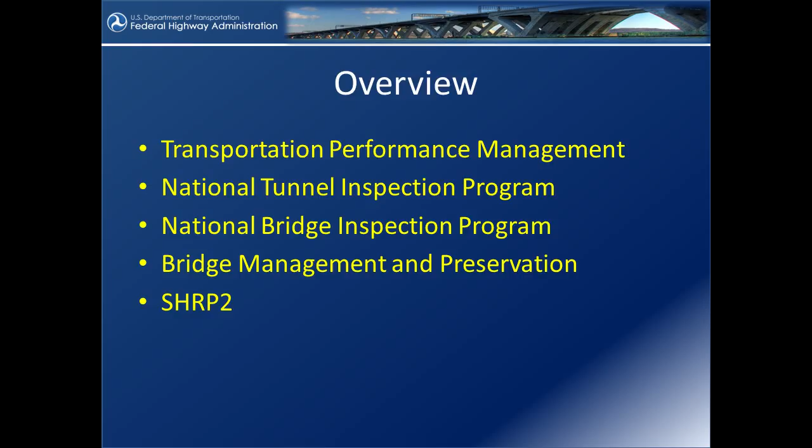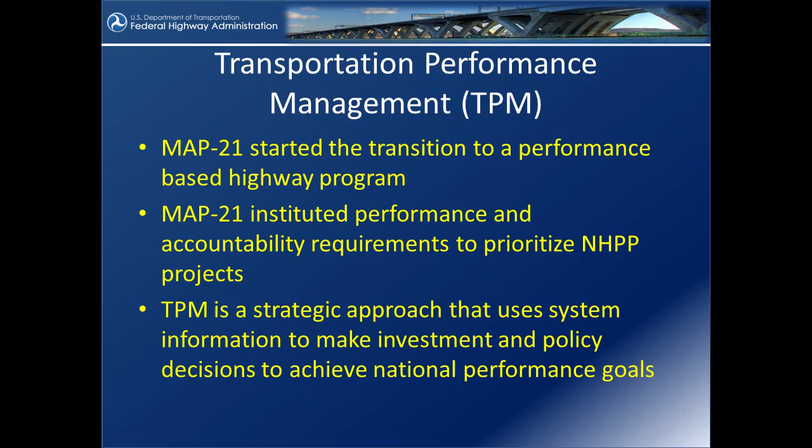As far as the Transportation Performance Management, MAP-21 has really pushed that and started the transition towards a performance-based highway program. MAP-21 is instituting performance and accountability requirements, and that's going to help prioritize the NHPP, which is essentially the major funding source for the NHS. Performance management is a strategic approach that uses system information to make investments and policy decisions to meet these different goals. So related to MAP-21 and performance management, FHWA is in the process of rulemakings, notices of proposed rulemaking, which we're going to talk about a little bit later. They were out there for pavement and bridge condition performance, and also for asset management.

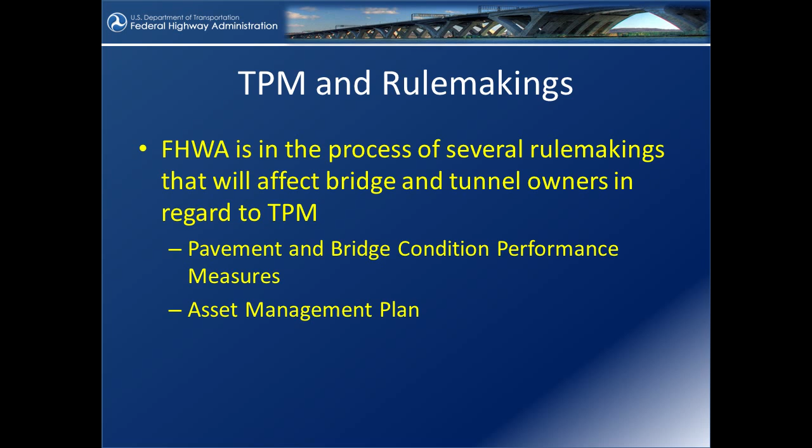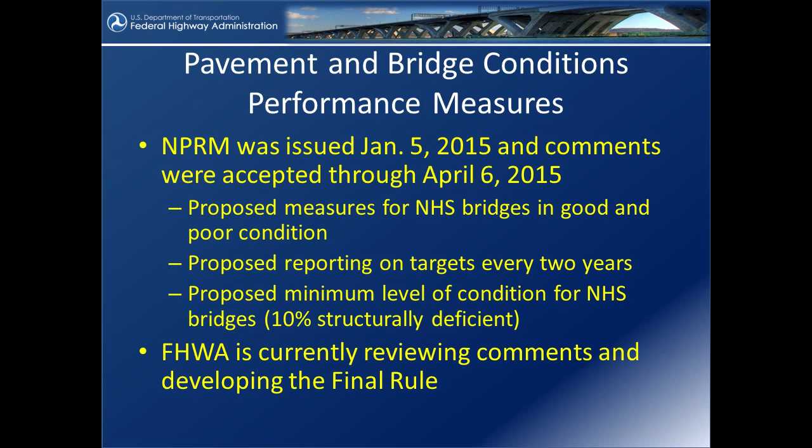The rulemaking for the performance measures was out on January 5th and closed on April 6th, and that was related to performance measures for the NHS, whether they're in good or poor condition, nothing in fair. Typically it's good, fair, poor. We're going to track good and poor. We also talked about reporting, how that was going to be done, as well as a requirement in MAP-21 which indicates that the NHS structurally deficient percentage should be less than 10%, or a penalty will be assessed. Because the rulemaking closed in April, we've collected all the comments and we're reviewing those, and we're going to come up with a final rule probably in the coming year.

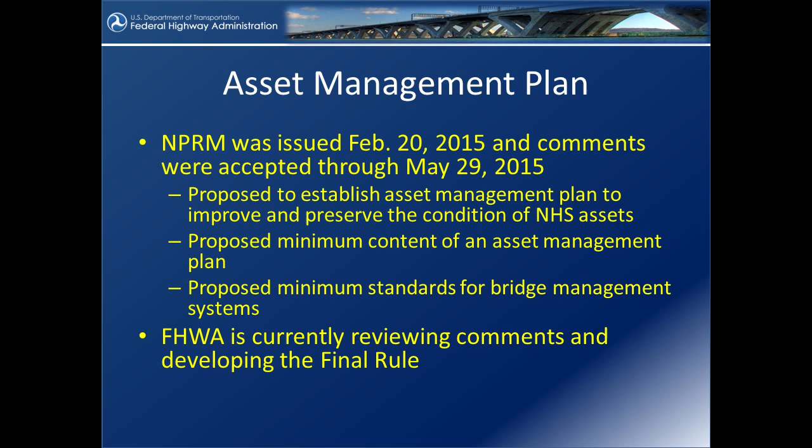Also, the same thing was with the asset management. There was a rulemaking that was sent out on February 20th and closed on May 29th, and that was to establish the requirements of an asset management plan, as well as minimum standards. So we're reviewing those comments also. Now, as far as the National Tunnel Inspection Program, that was also a requirement that we recently went through rulemaking on. I'm going to talk about the standards, the inventory, the Specification for the National Tunnel Inventory, the TOMIE manual, and some training that we're going to be having in the next couple months.

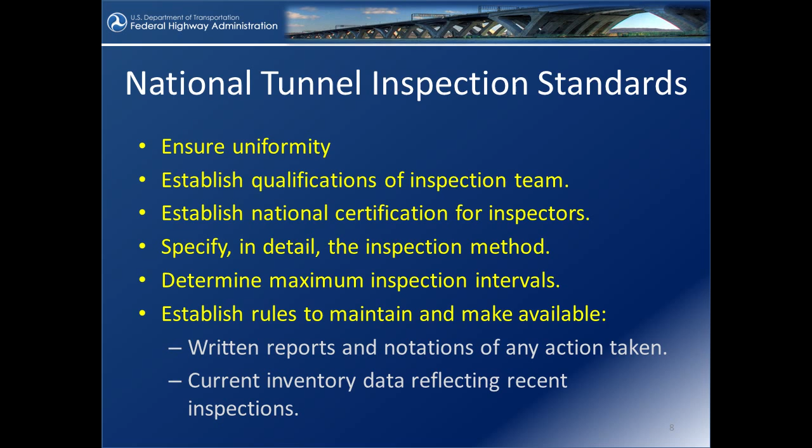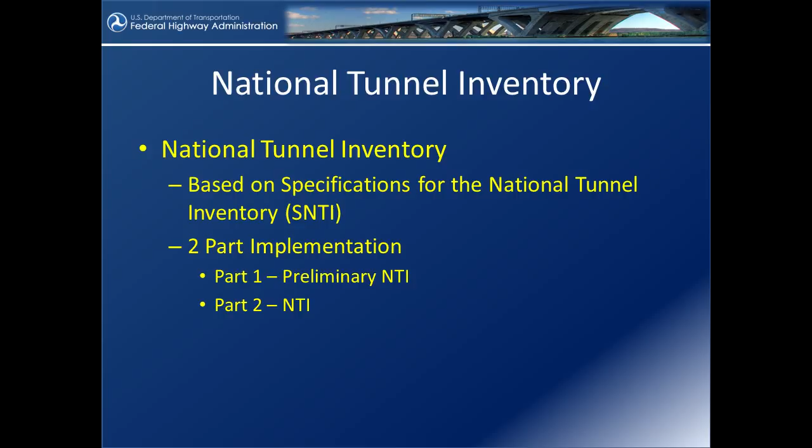So the tunnel inspection standards are similar to the bridge inspection standards, to establish uniformity and the qualifications and certifications for the inspectors. It also talks about how you do your inspections, the inspection methods and the intervals, as well as how you're supposed to do your reports and submit your inventory. Now, the National Tunnel Inventory will be similar to the National Bridge Inventory. If you're familiar with the NBI, this is going to be the NTI, and it'll be implemented in two parts. Part one is a preliminary inventory, which will be essentially geometric data, not really the inspections. Then a second part, a little later on, will be the requirement of having all the inspection data done by qualified people.

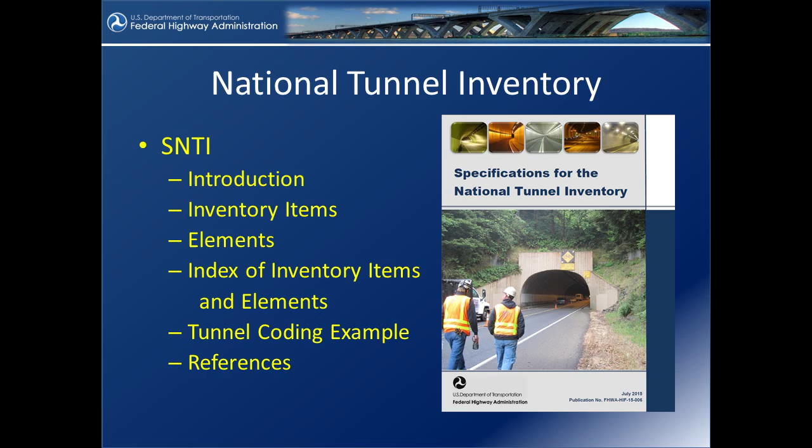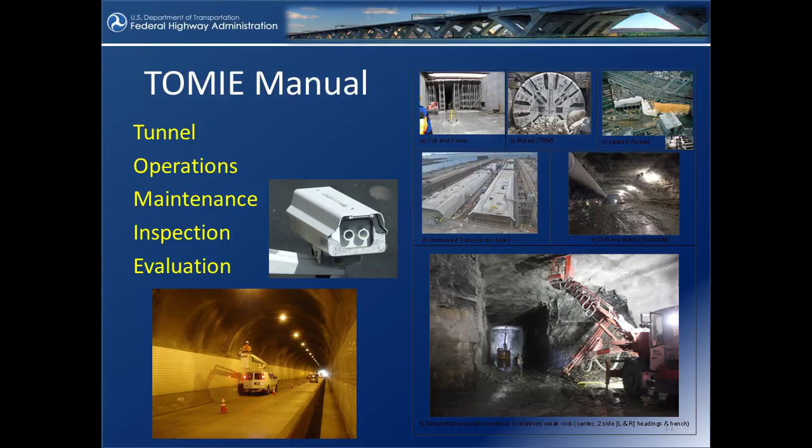So the SNTI is similar to the coding guide. If you're familiar with doing bridge inspections, you have the NBI coding guide. For tunnels, it's going to be called the Specification for the National Tunnel Inventory. The contents of the SNTI are shown in the slide. There's also the TOMIE manual, which stands for Tunnel Operations, Maintenance, Inspection and Evaluation. That's essentially like the BIRM, if you're a bridge inspector and know the Bridge Inspector's Reference Manual. This will be something very similar. Now the tunnel inspection course has been established. It's a 5-day course.

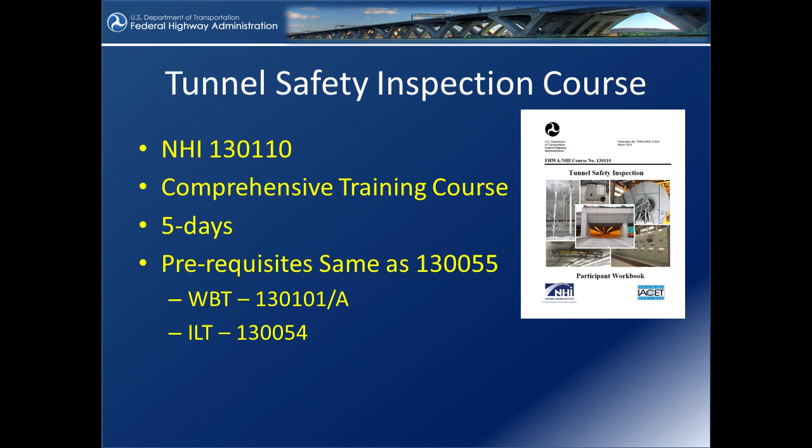It's a comprehensive course, just like the bridge inspection course, and it's going to be a requirement for team leaders who do tunnel inspections. The first 8 sessions have essentially been set up, and they will be reserved for 2 state DOT employees and 1 Federal Highway Division employee, and also some headquarters, resource center, and federal lands staff. It's going to be 8 different sessions around throughout the country.

And regarding the preliminary NTI submittals, that was what I was talking about with the geometric type data that's going to be required for the tunnels. It will need to be submitted by December 11th, 2015. So that's this year. By August 13th, 2017, the people who are doing the inspections will have to have all the qualifications as program managers, and the team leaders will have to be gathering the requirements through the training as well.

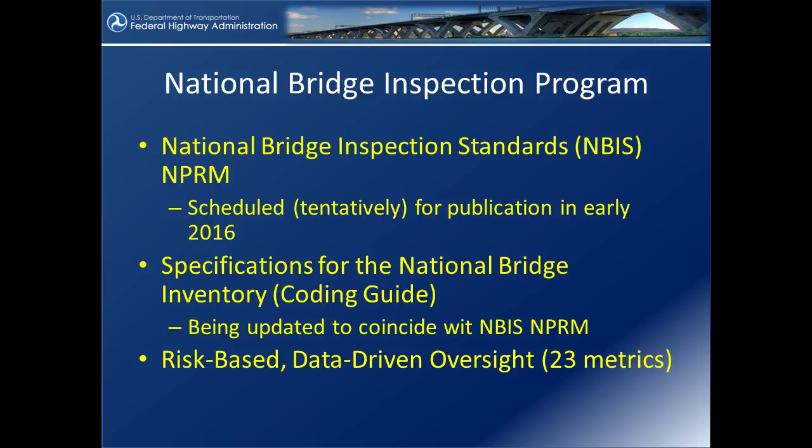Now, as I mentioned, for the National Bridge Inspection Program, we are actually having a rulemaking that's going to be coming out late this year, early next year. That's something you might want to look out for. It's also going to incorporate the new NBI coding guide that's going to be in English units. It's going to be called the Specification for the National Bridge Inventory. And also the requirements are going to be outlined for what we're doing now, the risk-based data-driven oversight for the bridge inspection program, also known as the 23 metrics.

We started the 23 metrics back in calendar year 11 and have been doing it for 4 years. And you can see from here the trends that we're seeing for the conditionally compliant metrics. We originally started out in the first year with 338 throughout the country that were conditionally compliant, essentially non-compliant, and by this past year we're down to 145. This is kind of a busy slide. What it's actually showing is that most of the metrics are getting better. On the left-hand side is the first year, and all the way on the right is the current year, and it shows what percentage of those metrics are in satisfactory condition, which means either substantial compliance or in compliance.

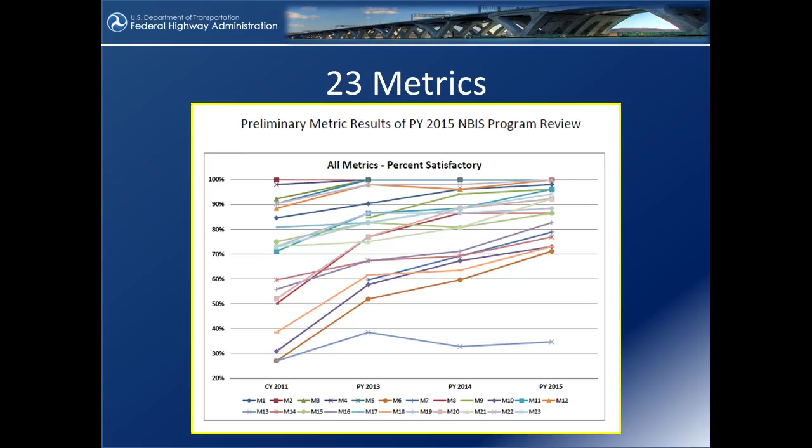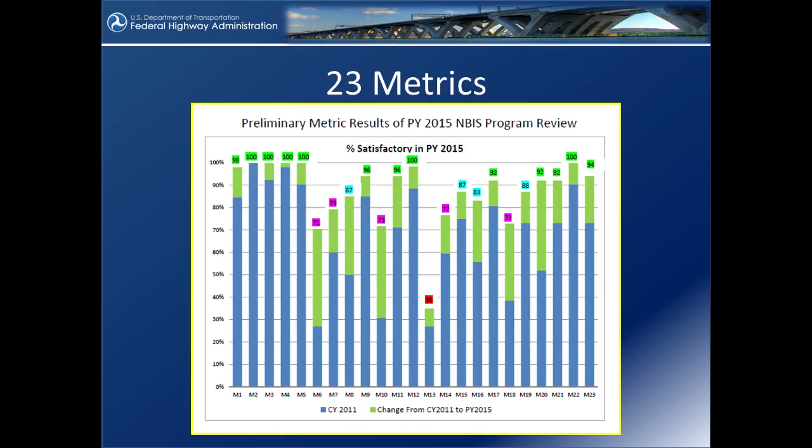This is also another graph that shows the status of the metrics. The metrics, if you're not familiar with it, outline every little piece of the National Bridge Inspection Standards. The one that's real short, metric 13, is about load rating, and many of the states are not in full compliance with the National Bridge Inspection Standards for that, so that's why it's so low.

Now, there's also some training courses that are already out there. They're web-based training on bridge preservation. There's also some web-based training on bridge management that's available. And the bridge maintenance training reference manual is being updated for 2016. If you want any information about those training courses, go to the NHI website.

SHRP 2 is the last thing I wanted to talk about, and there's a solicitation that's soon to be out for the 7th round, and it will include this offering of service life design for bridges, which is very applicable to bridge preservation. It is actually a repeat of a SHRP 2 activity that happened earlier. The lead adopters the first time out were Pennsylvania, Oregon, Hawaii, Iowa, and Virginia. So if you have any questions, you may want to contact them about whether it's a good idea to submit a proposal for that.

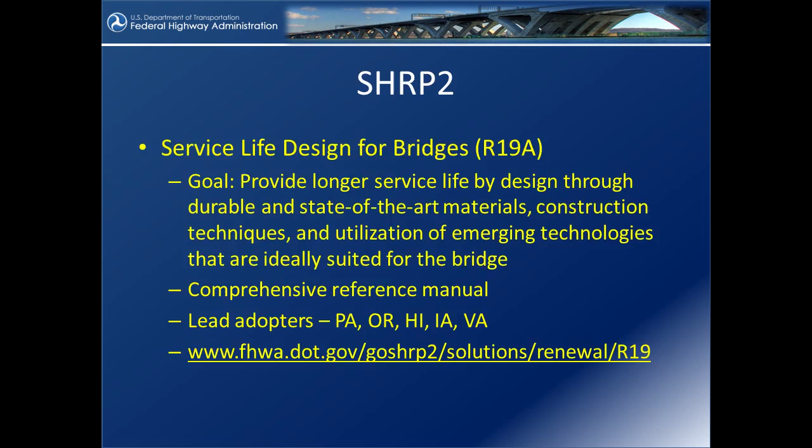Okay, that was very quick. I tried to get us back on time. So any questions about anything? Okay, thanks.